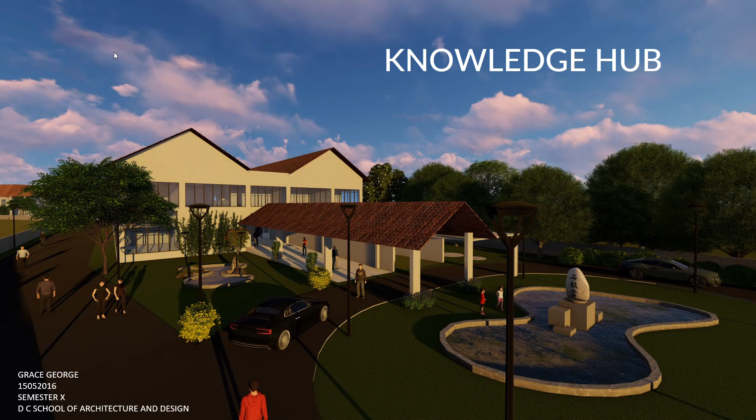I'm Grace George, and the thesis topic I've chosen is Knowledge Hub, or a library for the 21st century, located at the heart of Trivandrum city, the capital city of the state of Kerala.

According to UNESCO, the public library, the local gateway to knowledge, provides a basic condition for lifelong learning, independent decision making, and cultural development of the individual and social groups. Libraries are the real heritage of a city. They have traditionally been centers of learning hubs where knowledge was disseminated. The concept of a library continues to hold a special place of importance in people's hearts and way of life.

The reason that libraries continue to exist is their ability to adapt. They adapt to the changing priorities and the changing economic status of their service areas. The onset of advanced technologies has changed some of our reading habits, but our need for shared, community-centered spaces to find information and connect with others remains the same. To survive in the digital age and stay relevant, public libraries need to be innovative. They must take up both the physical and virtual mediums.

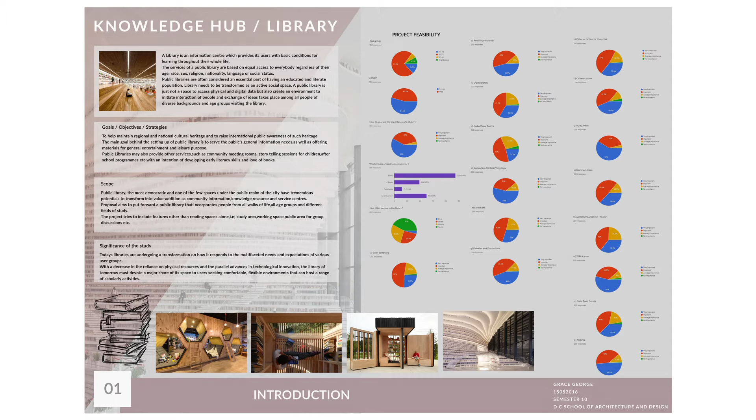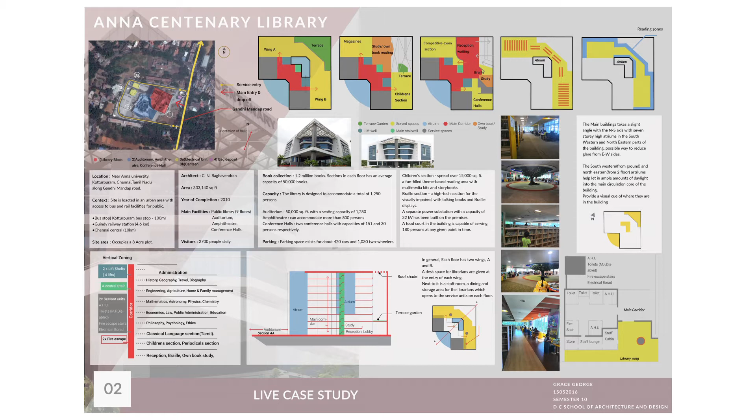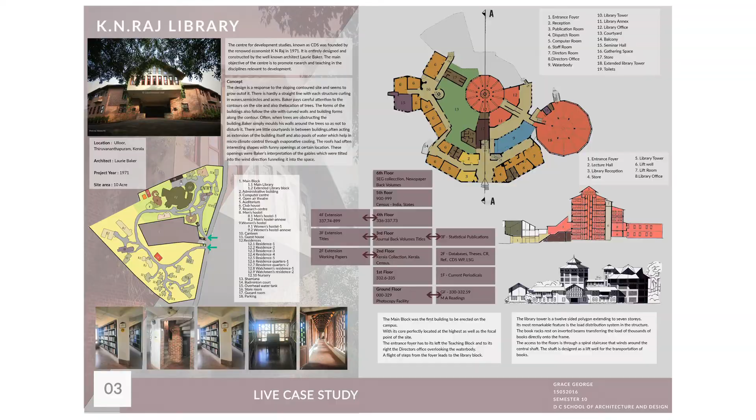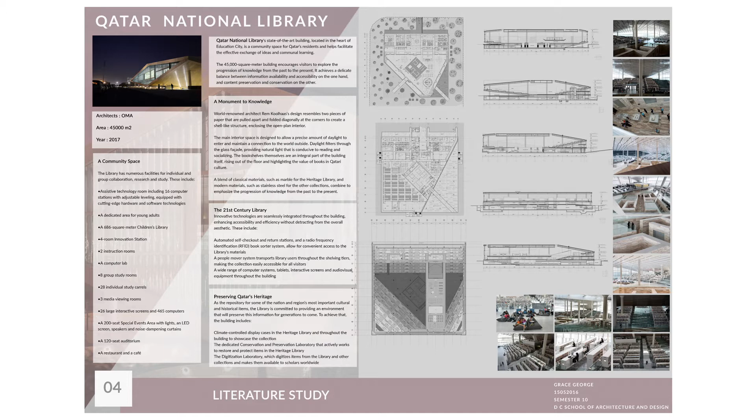Coming to the literature study, the first one is Qatar National Library. Designed by Rem Koolhaas, Qatar National Library's state-of-the-art building is located in the heart of Education City and acts as a community space for Qatar's residents. It is a 45,000 square meter monument to knowledge and a 21st century library which is also preserving Qatar's heritage.

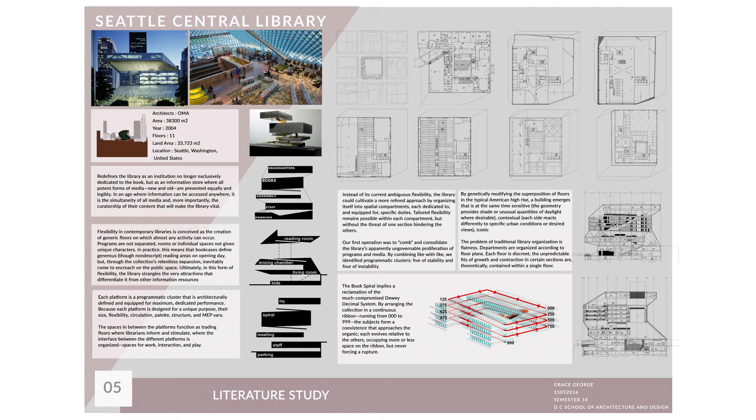From all these case studies, it is clear that libraries have to modernize while staying true to the heart of what they offer. They must continue to build flexible spaces to accommodate new uses and new technologies. While libraries may need to house fewer physical materials, they need space for their members to generate their own materials and space for the community to come together and share ideas. Regeneration would allow a public library to behave as a common community information, knowledge resource, and information center.

The conceptual development. As we all know, libraries have evolved to be spaces that not only shed light on conventional means of knowledge, but also encourage their users to interact, share ideas, and grow together.

Based on this idea of evolution of modern libraries, my project tries to promote the concept of human libraries. In this library, people are the living books that engage visitors with stories and conversations. The concept was first introduced and the first human library was started in Copenhagen, Denmark in 2000. At present, Human Library Organization is currently active in over 60 countries.

The Human Library is an international organization that aims to help people appreciate others' differences, understand social barriers by listening and relating to their experiences. Anyone can be a resource or a living book, anyone with a unique story to tell. The living books here are people who have experienced prejudice or been victimized due to race, sex, age, disability, sexual preference, gender identity, class, religion or belief, lifestyle choices, or other aspects of who they are.

People who visit, borrow these living books, have a conversation with them, and leave with a widened perspective on different social groups in our society. It is a place where difficult questions are expected, appreciated, and answered.

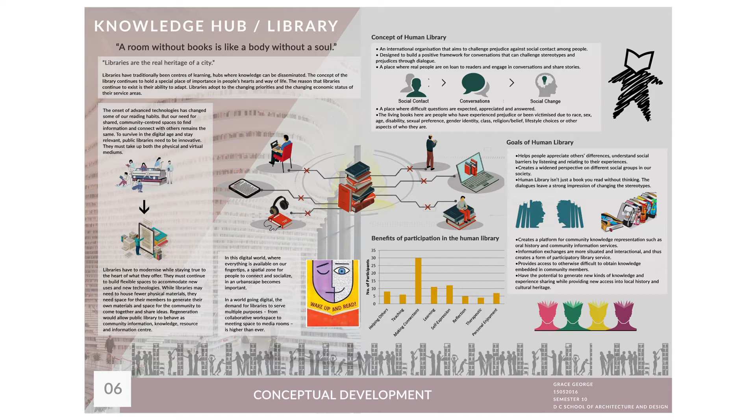There are several benefits of the Human Library as they provide access to otherwise difficult to obtain knowledge embedded in community members. They have the potential to generate new kinds of knowledge and experience sharing while providing new access into local history and cultural heritage. There are several benefits of participation in the Human Libraries too, as it builds a platform for the human books to self-express and reflect, learn and make connections with the society and help others.

Coming to the design program, the design tries to build up a public platform for people of all age groups to enable self-learning and aims to break the stereotype of books as the only medium for information and to bring up the new technologies and making it accessible to everyone. Today's libraries are experiencing a period of changes. In order to get through in a constantly changing environment, every library has to evolve itself according to the needs of modern information society. Thus, a library's environment has to be developed systematically following the principles of architecture.

Today, we perceive the relevance of the development of an engaging and inviting public library by all means architectural, functional, services provided, etc. It has to correspond not only to the informational and communicational aspects, but also to the cultural, leisure, aesthetical, and other community needs. Libraries have to revise and organize themselves to provide non-traditional, cultural, and social activity in addition to traditional library services. That's why we need to establish today a new multifunctional type of library corresponding to a flexible model where one-third of the library space needs to be assigned for the additional social and cultural activity.

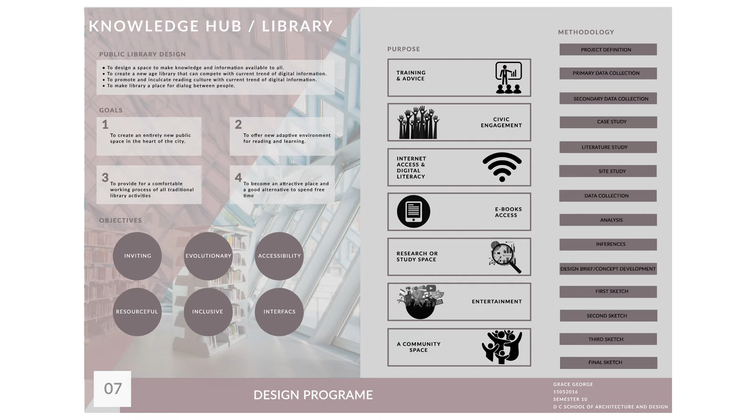Based on this perception, a design brief was formulated where the main challenge was to design or completely rewrite the universal definition of public library and democratize education and learning through refreshing spatial ideas. The design tries to develop a space that acts as an access point for information presented in a variety of media. An interactive zone where people can socialize, exchange thoughts, nurture new ideas, and shape new opinions. A platform for different activities with entertainment added to it. And an opportunity to enable self or collective learning at any age.

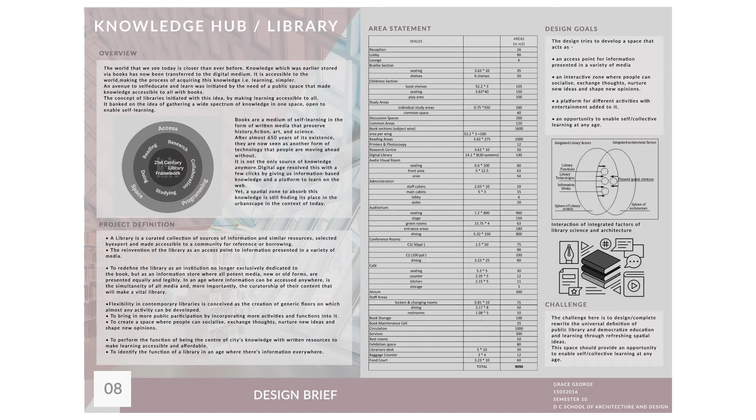Coming to the site. The site is located in the northern part of the Thiruvananthapuram city at Kowdiar Avenue Road, which is one of the fastest growing prime residential areas of the city. The site covers an area of 13,150 square meters or 3.25 acres. The site is an L-shaped land with large frontage available at the Kowdiar Avenue Road. The road is proposed to be widened as a 24-meter wide road and the front portion of the site thus goes for road widening and the rest of the site area becomes 2.71 acres.

The rear side of the site is Kowdiar Palace, which is the famous landmark of the city. The site has rich vegetation and is sloping upwards as one moves away from the road inside the site. However, the average gradient is not quite steep. The site is easily accessible from all parts of the city and well connected to other main commercial locations of the city, that is MG Road, Chalai Bazar and Pattam Junction, and the area is well connected to all important landmarks of the city through Kowdiar Avenue Road.

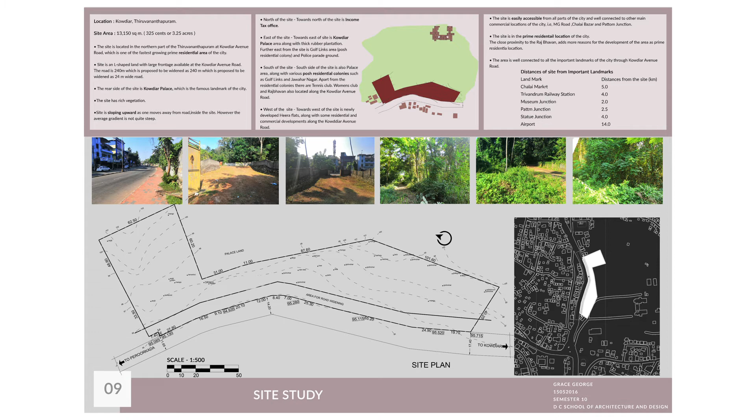Context. Towards north of the site is Income Tax Office and towards east of the site is Kowdiar Palace area along with thick rubber plantations. South of the site is also Palace area, along with various posh residential colonies such as Jawahar Nagar. And towards west, we have some residential and commercial developments along the Kowdiar Avenue Road.

The SWOT analysis: the strengths being easy accessibility, well connected to other main commercial locations, very thick vegetation in the site. And the weakness, the site width is very narrow in the middle. The site has architectural controls, that is the maximum height of the building is restricted to 2 floors from ground level. The opportunities: the high concentration of user groups in the surrounding context, fastest growing prime residential area of the city, average grade is not too steep. And the threat is due to road widening, the site again becomes narrow.

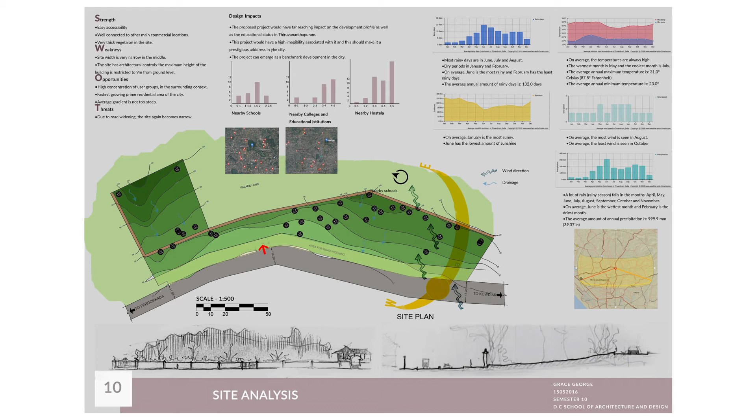The zoning was done by taking into consideration the different site characteristics. The narrow middle portion of the site was thus included in the design as a connecting space. Further, the different functions were arranged into 2 different blocks. The site had a gradual slope and had an overall height difference of 6 meters. The road being at -2 level, the site was further developed into 2 levels at +0 level and +4 level.

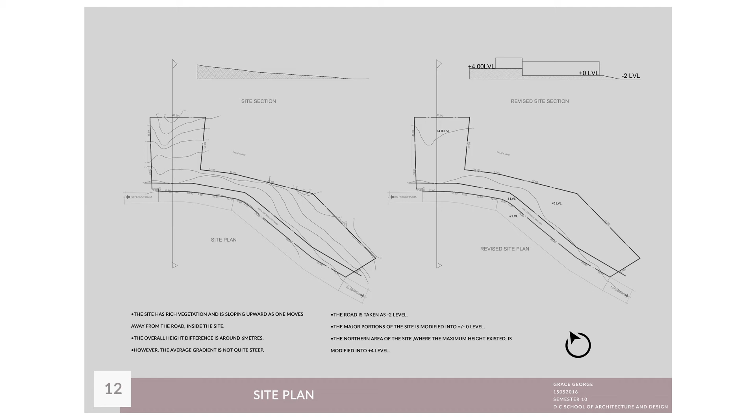The master plan. The site has its main entrance from the Kowdiar-Perrorkada road on its right corner, and we enter the site. We first reach the main block where we have the drop-off. The vehicular movement is restricted to the front portion of the site, and the parking facilities are in the basement, and a few parking spaces are also allotted in the front area. A pedestrian road runs along the length of the building.

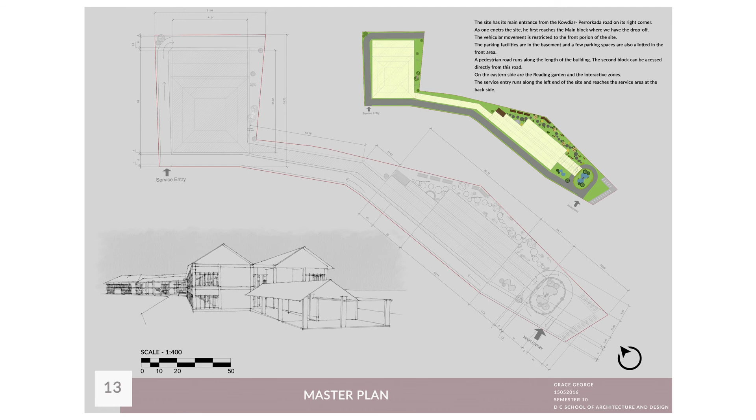Coming to the floor plans, in the ground floor we have the reception, book issue, braille section, admin block, audio books, fiction and reading spaces arranged in the main block. The reading garden can be accessed from the main block. Then we have the long corridor space that functions as the main connection between the 2 blocks of the library. The space also turns out to be the main activity zone of the library, as it lays out the normal informal reading areas, discussion spaces and interactive zones for the people.

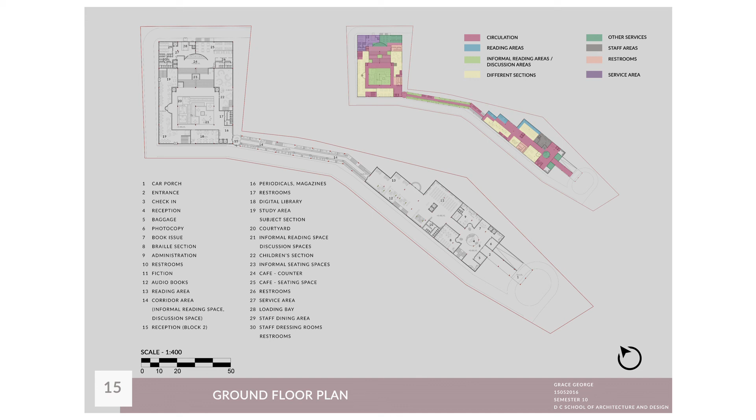The second block houses the study areas, digital library and children's section with a small outdoor play area. The third block at +4 level has the cafe area and the service areas. The central open to sky courtyard becomes the second major interactive zone of the library, followed by the long flight of wide steps that connects the second and the third blocks.

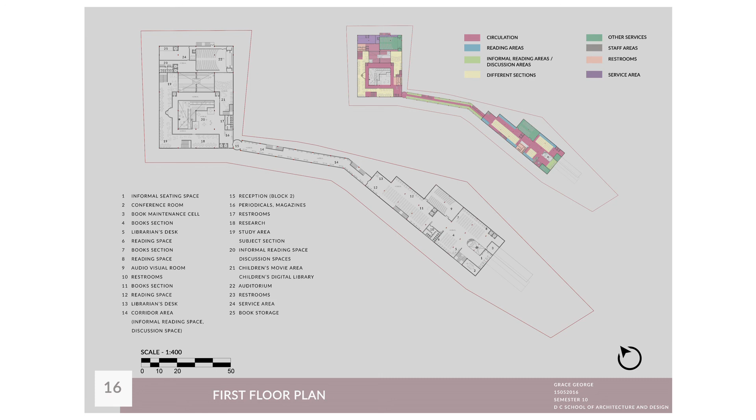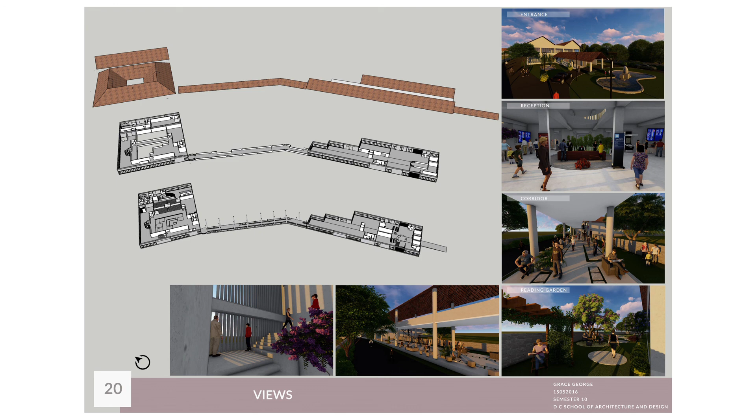On the first floor, we have the main book sections and reading spaces. It also has an audio-visual room, a conference room, a book maintenance cell, etc. The long bridge again becomes another activity zone of the library. The second block has the rest of the study areas, a research center, children's movie area, and digital library. The third block has the auditorium and the service area. The roof plan, the elevations and views, the sections, the different views of entrance, reception, corridor, reading garden, etc.

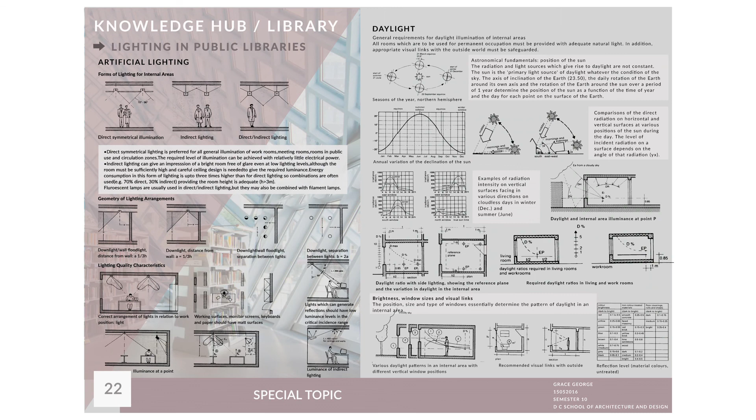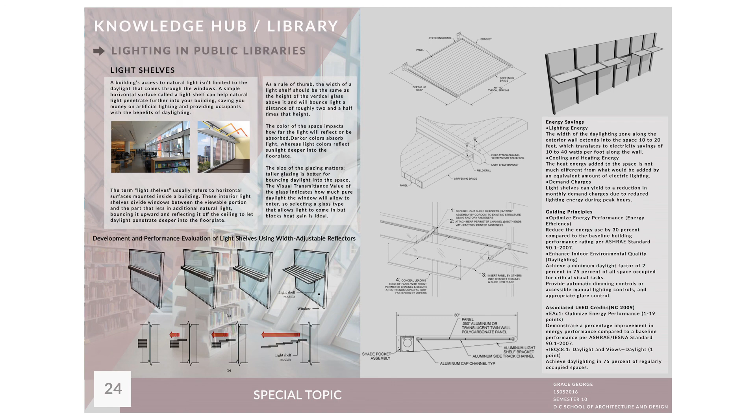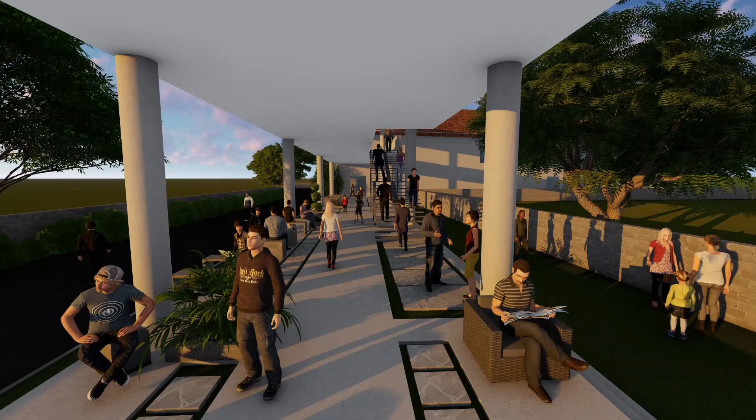And for the special topic, I chose the lighting in public libraries and studied both the artificial lighting and daylighting and the different elements used for both, and studied in detail about the light shelves. Libraries continue to be a significant element of the academic and cultural landscape of most countries. They are a resource to be treasured and one that we must fight to protect.